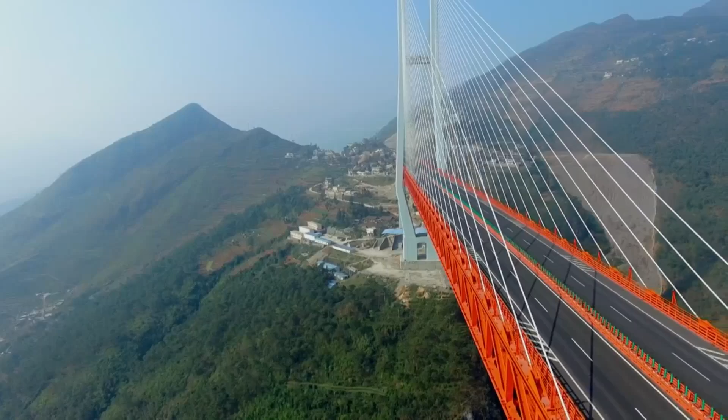The solution engineers in China have come up with is breathtaking. This is the Beipanjiang First Bridge. With a deck nearly 2,000 feet above ground, it's the highest bridge in the world. It is remarkable how high this bridge is and how long it extends. And at almost a mile long, it's one of the longest cable-stayed bridges on the planet.

Liu Ba is deputy chief engineer of the bridge. So this is the Beipanjiang Bridge. Yeah. It's normally off-limits to pedestrians, but he's giving two colleagues a unique tour. It's very high. Very high. When we came here, it's very difficult to go to the two sides. Yeah. It's the highest bridge in the world now. Yeah. Such a beautiful bridge.

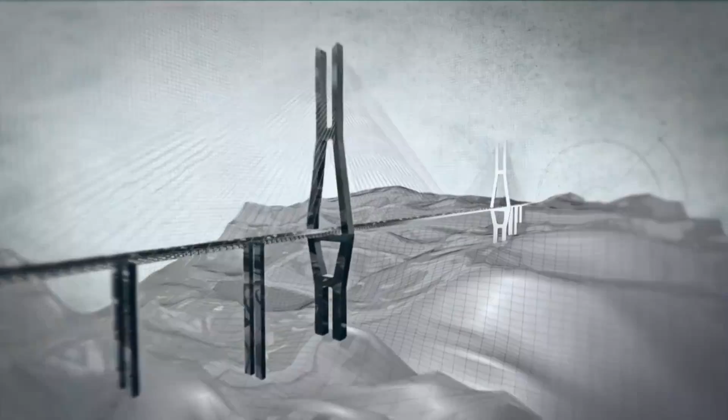The bridge is made up of a pair of massive concrete towers, the tallest reaching 883 feet high. The 22,000-ton steel bridge deck is the length of 5 Titanics. It's so high, One World Trade Center in New York could fit underneath. The deck is attached to the towers with 250 miles of cables, enough to stretch from New York City to Washington, D.C.

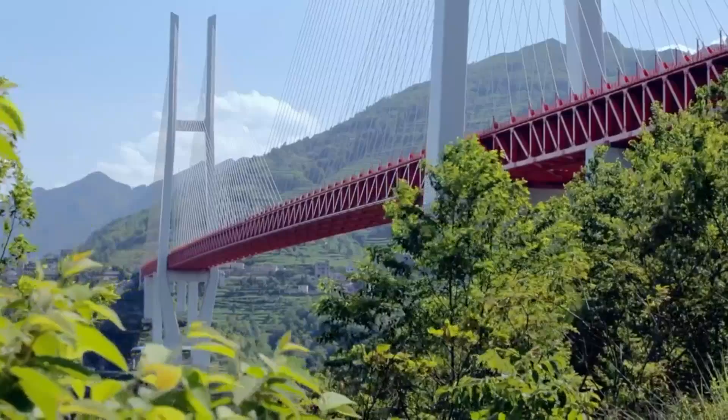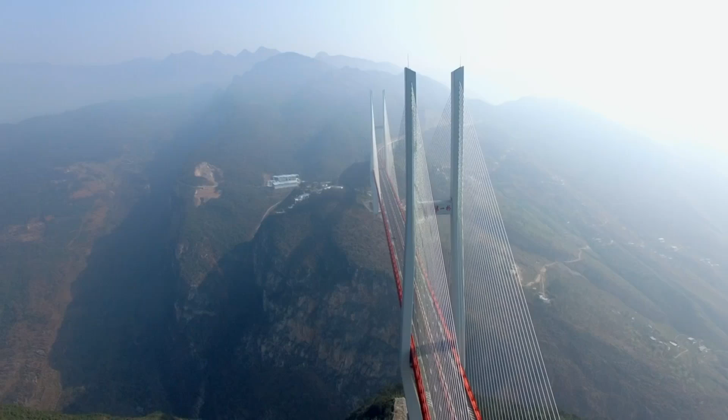But to create this unprecedented structure, the team need to solve many tough engineering challenges. How do you construct terrifyingly high concrete towers? It's very difficult to pump the concrete from the bottom to the top. It's really a critical issue during the construction. How do you assemble a super long bridge deck in such a dangerous environment? The valleys here are so deep you can't even see the bottom. This is too high to build temporary scaffolding for a bridge deck.

And what type of bridge do you build on vertical cliffs full of hidden caves and crumbling rock? To build a bridge here is really a great challenge for me. I'm not sure we can achieve it or not. Before engineers could even get started, they would have to find a way to work with the area's deadly geology. The rocks around this region are very soft. Also, it's very steep. To make things even more difficult, there are a lot of hidden caves and cracks along the mountain. This poses a huge challenge for the engineers to design the bridge.

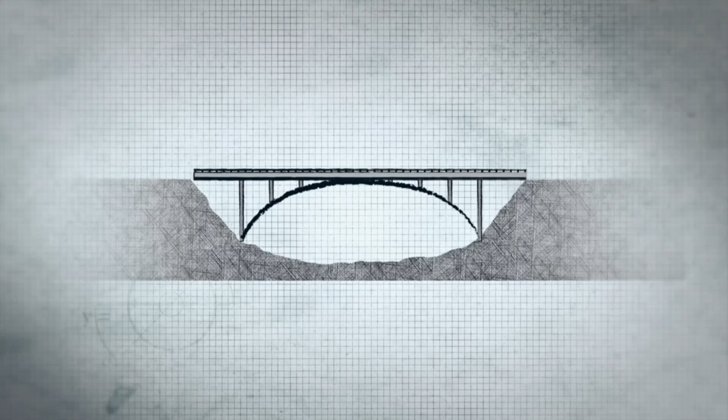Most types of long-span bridges need support anchors built into the rocks. For an arch bridge, weight pushes down, and the bridge's curved shape moves the force sideways. So they need gigantic anchors in the banks. On a suspension bridge, the deck hangs from 2 cables, which also need huge anchors to keep the bridge from collapsing. But the soft, crumbly, landslide-prone rock in this region isn't suitable to hold massive bridge anchors.

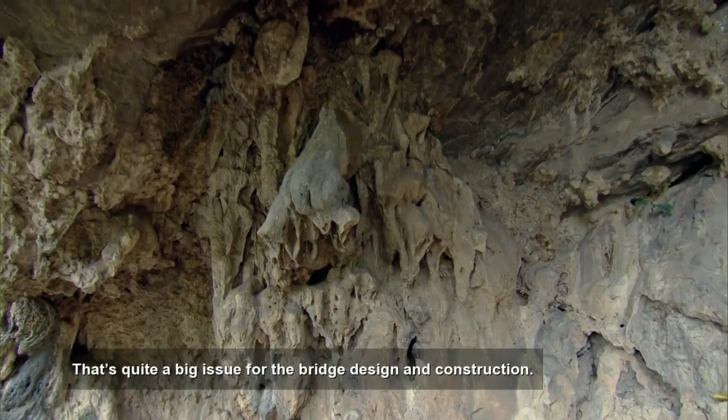Liu Ba is on site surveying the rock. This is an example of the difficult geology. The limestone rock, and you can see so many caves and cracks on the rock. That's quite a big issue for the bridge design and construction. It's really a nightmare for the engineer. The only option is to find a bridge design that doesn't need the support of anchors, which means the team will have to draw inspiration from the pioneers of the past.

This is amazing. A tour of London on a beautiful sunny morning on a boat on the River Thames. Physicist Andrew Steele is exploring London from a unique perspective. Look at this absolutely beautiful structure. It's the iconic Tower Bridge. From down here, this structure just looks absolutely enormous. There's an incredible range of bridges in the British capital, which could help inspire the team in China.

This is Blackfriars Bridge. It's an arch bridge. It was constructed in 1869, and from underneath you can see these beautiful wrought iron ribs which are holding the whole structure up. Here we have Chelsea Bridge, a suspension bridge. You can see that big red cable running along the top. That's the main cable. Among these famous giants, there's a lesser-known bridge that's actually one of the most important in the world.

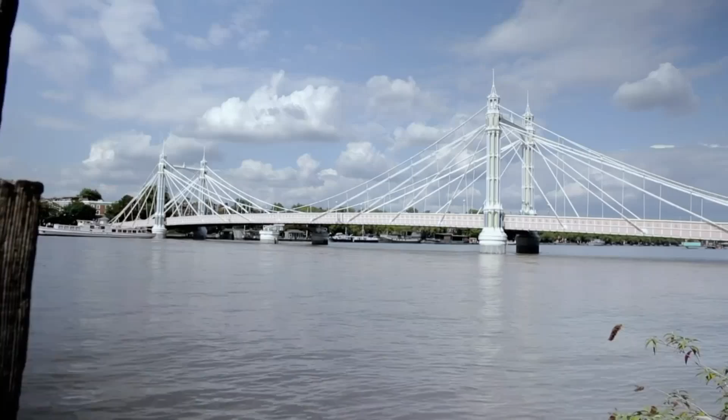This is a piece of engineering history, an entirely new type of bridge that people didn't think at the time could even be constructed. Built in 1873, this is Albert Bridge. From an engineering point of view, there is an awful lot going on here. You can see we've got these support columns, we've got the curved cables, the straight cables. Pretty daring for the time. Albert Bridge is the brainchild of British engineer Rowland Mason Ordish, who was determined to build the impossible.

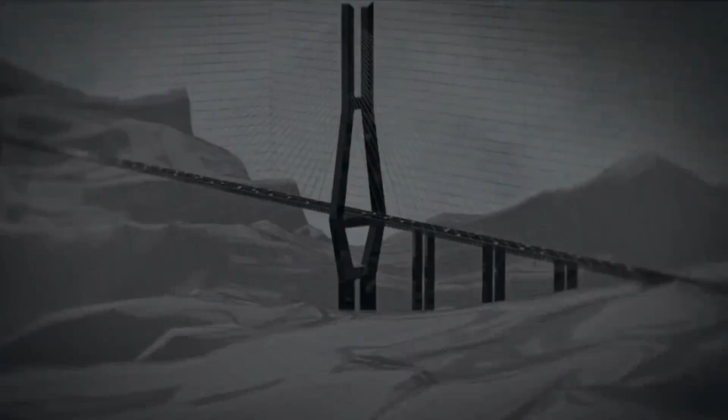The Victorians had managed to build loads of different kinds of bridges, but there was one particularly desirable design that remained elusive. It's called the cable-stayed bridge, and the idea actually dates from centuries before. It was in the 1600s that the first cable-stayed designs were proposed, even before the existence of actual cables. The design of a cable-stayed bridge means all the weight is carried up through the cables and down through the towers, so it doesn't need anchors on the banks.

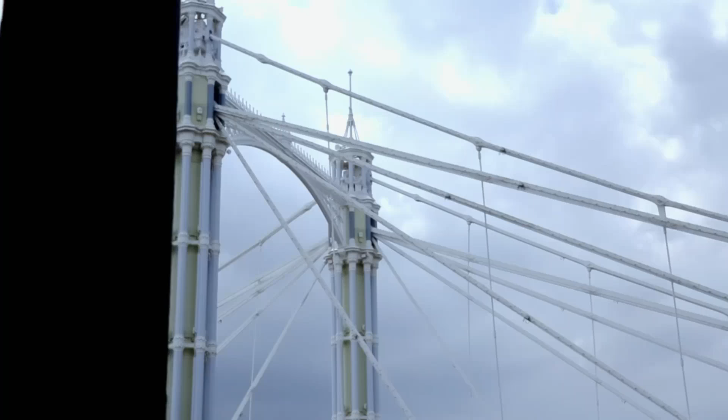But in the 19th century, building a cable-stayed bridge had never been successful because the forces are so complex. The problem was the maths was just too hard. Imagine trying to calculate all the forces on one of these cable-stayed bridges. You've got loads of different cables, all at different angles, pulling on the bridge, pulling on each other. It's a trigonometry nightmare. Over-tensioning even a single cable could lead to a catastrophic failure. For 200 years, people thought the cable-stayed bridge was never going to be built.

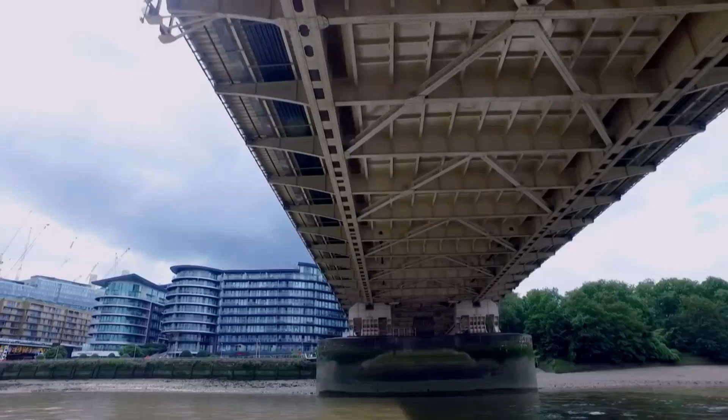Ordish knew the risks of building a cable-stayed bridge. So to ensure Albert Bridge didn't fail, he ingeniously combined it with a suspension bridge. From up here, you can really see what's going on with this bridge. Since we're in the middle, this is the main cable, the suspension bridge aspect of this structure. And we've then got these smaller suspenders. And what these do is connect the main cable to the span of the bridge, allowing it to support the bridge at multiple points along its length.

And then finally, this is what makes this bridge so special. Here we find the cable stays, and it's really clear from this angle what they do. They're taking some of the load from this span and then transferring the force up into those towers there. This is two bridges in one, and that is the genius of Ordish's revolutionary design. Albert Bridge was a major step towards building a pure cable-stayed bridge that didn't need anchors. Exactly what the engineers in China are looking for.

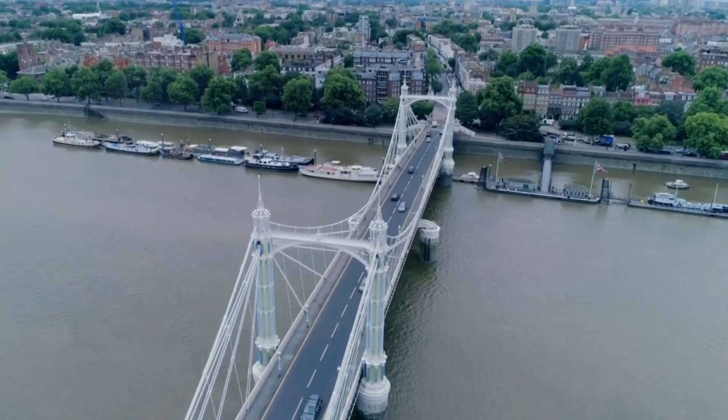And today, cable-stayed bridges are commonplace. So when you see a modern cable-stayed bridge, it's all thanks to pioneers like Ordish, who, over 150 years ago, showed that this elegant and deceptively complex design could be done. In China, engineers are building on Ordish's groundbreaking work and supersizing it for the 21st century.

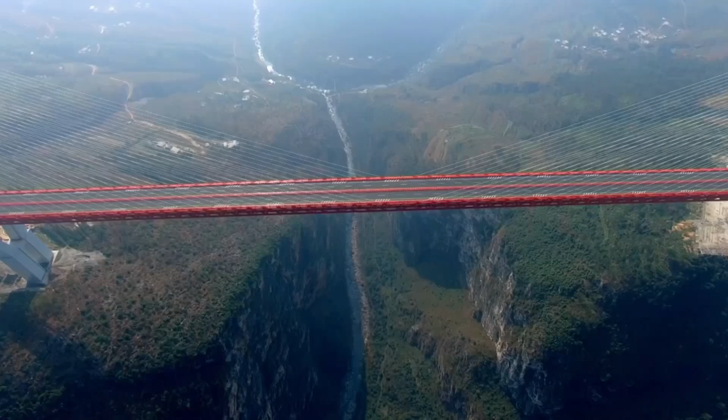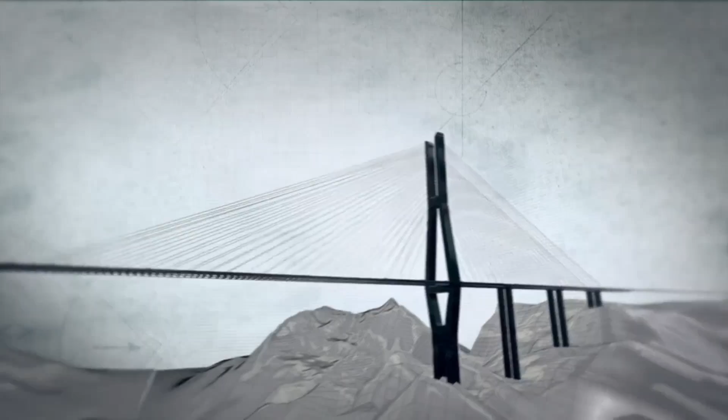The Guizhou and Yunnan regions of China, separated for centuries by this cavernous abyss, until now. This is the Beipanjiang First Bridge. The bridge stretches almost a mile across the ravine. The tips of the towers reach 2,461 feet above the valley floor, higher than two Eiffel Towers and the Statue of Liberty combined. And it's the first ever cable-stayed crossing to hold the title of world's highest bridge.

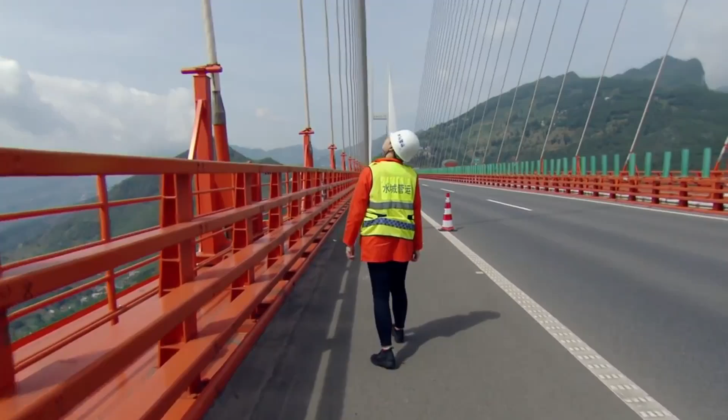Architect Wendy Falk has special access to this engineering marvel. This bridge is amazing. This is so exciting. I'm going to actually go and climb over this and take a closer look at the cable stay myself.

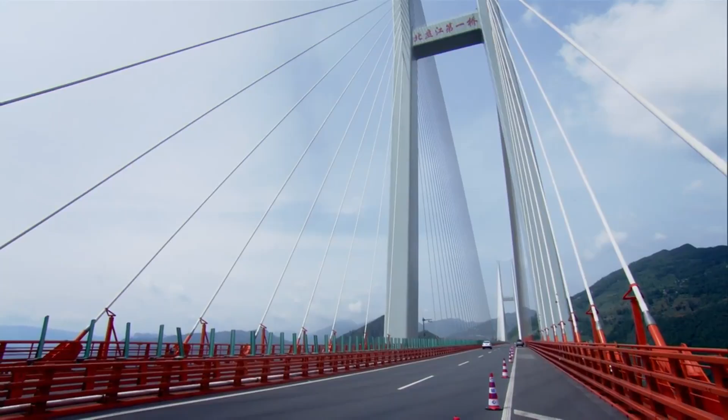The view up here is absolutely insane. It's actually quite amazing that this bridge is held up by the cables and by these amazing towers that are on the left and right of us. So there are no anchors on this bridge. The only way to build this bridge in this region is to have a cable-stay design.

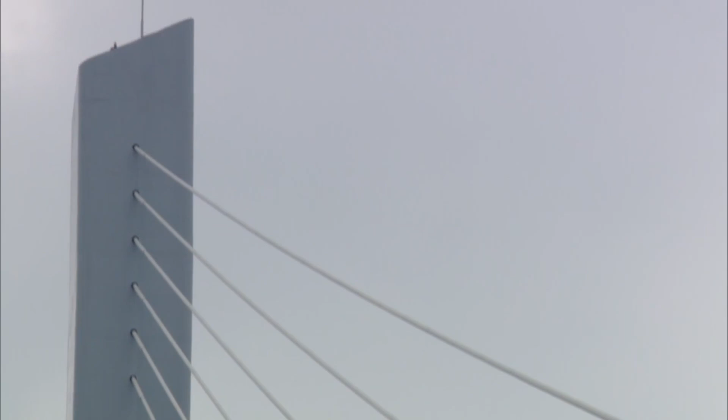The load from the 22,000-ton deck and everything on it is carried through 224 cables into the towers and down into the foundations, removing the need for anchors. But attaching each cable was an extensive job for engineers. There's actually a lot of smaller cables on the inside that's bundled up that is then connected onto the anchor point on the bottom.

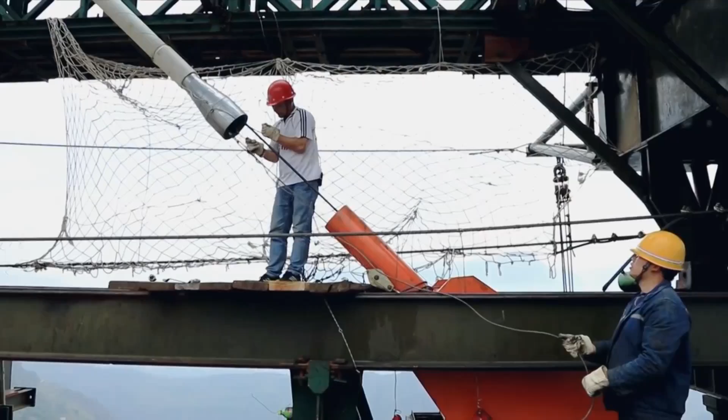First, one of the cable strands is pushed through a waterproof casing. It's then attached to one of the towers and joined to the bridge deck. More strands are then threaded through the casing. Up to 43 make up one cable bundle, the longest of which is 1,253 feet. Each bundle is tightened into a carefully calculated strain.

Getting the cables and the tension right in this bridge is crucial. So inside of each of these cables is a gauge that measures the constant tension on this bridge. If any of the strand cables fail, engineers in a control center can immediately spot and replace them. The marvelous aspect about this bridge is that even if you were to remove one cable, the bridge is still stable. And that's pretty incredible.

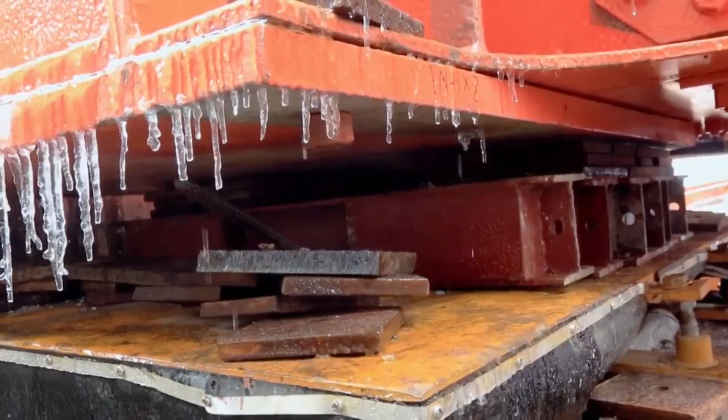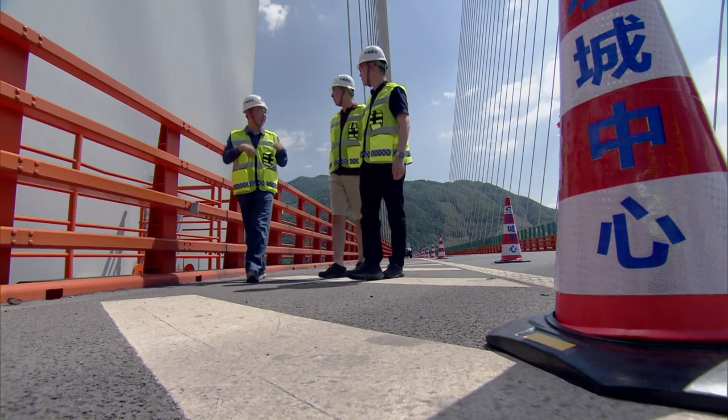But winter in Guizhou brings a new onset of problems. It is one of the most severely frozen areas in western China. And because of the bridge's altitude, ice could form on the cables. It's a potentially deadly problem that Liu Ba and his team have to solve. If the ice spreading comes, there will be some problems related to the safety of the traffic. So the ice will cover the cable in the winter. Yeah, the ice will accumulate.

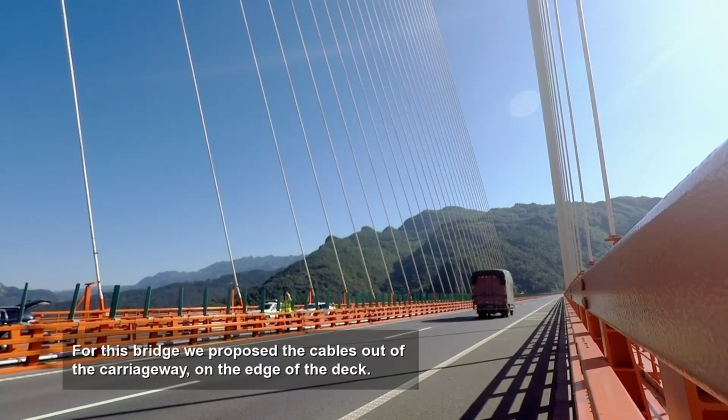Most bridges propose the cables in the middle, just above the carriageway. Yes. When the ice accumulates on the cables, there will be ice fragments falling down onto the deck. With the risk of falling ice causing a potentially fatal traffic accident, engineers came up with a brilliantly simple solution. For this bridge, we proposed the cables out of the carriageway on the edge of the deck. Then ice drops out of the carriageway. That's very clever. Yeah. Moving the cables to the edges of the bridge will force ice to fall safely into the valley and keep this lifeline flowing all winter long.

But engineers have even greater challenges ahead. In order to build the tower, the engineers have to think about getting concrete all the way up to the top. It's just mind-boggling.

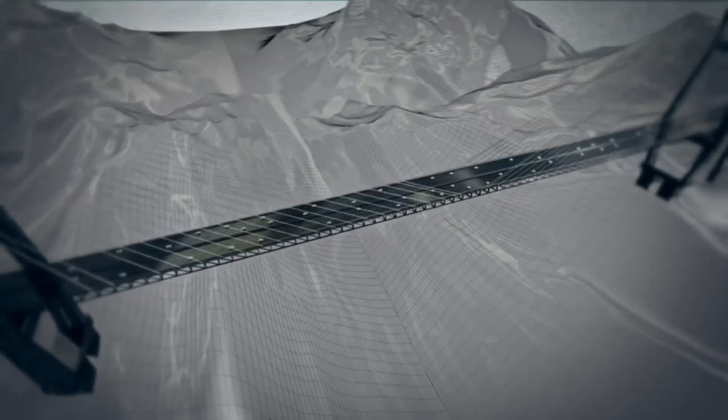Guizhou Valley, China. Known as the crack in the earth. To cross it, engineers are taking on the impossible with the world's highest bridge. The Beipanjiang First Bridge is a crucial crossing for millions. At almost a mile long, and with a staggering 2,362-foot main span, this is a cable-stayed bridge on an epic scale. But designing a structure of this magnitude presents a terrifying set of challenges.

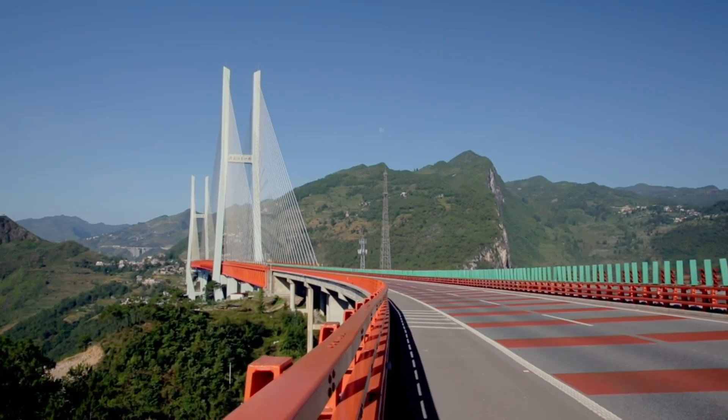Architect Wendy Falk has traveled from New York to check out this engineering marvel. This bridge is incredibly long, and it's really rare for a cable-stay bridge to be this long. Devising a super long cable-stayed bridge is extremely complex. Everything is connected. If one thing changes, everything else is affected too. Imagine my hands are the cables, and as the span of the bridge gets longer, the angle of the cables gets flatter, and that's bad because it puts the deck under compression.

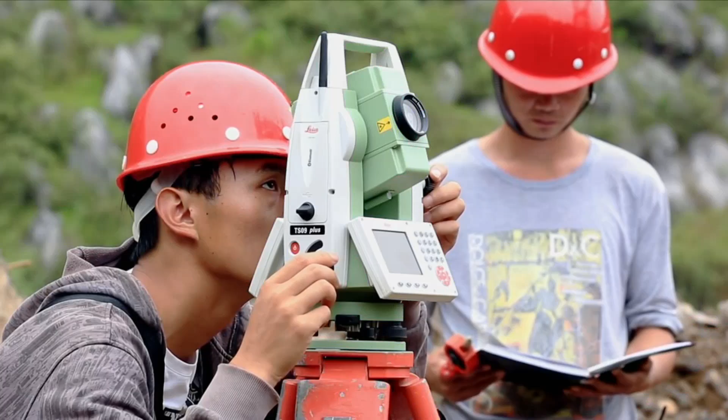There's an optimal angle for these cables, which is 30 to 40 degrees. And in order to build a bridge this long, you need a very tall tower. Basically, the longer the bridge, the taller the tower. This exceptionally long bridge needs exceptionally high towers. In order to build the tower, the engineers have to think about getting concrete all the way up to the top. It's just mind-boggling. So how do you build soaring concrete towers? The answer lies with a pioneering innovation from the past.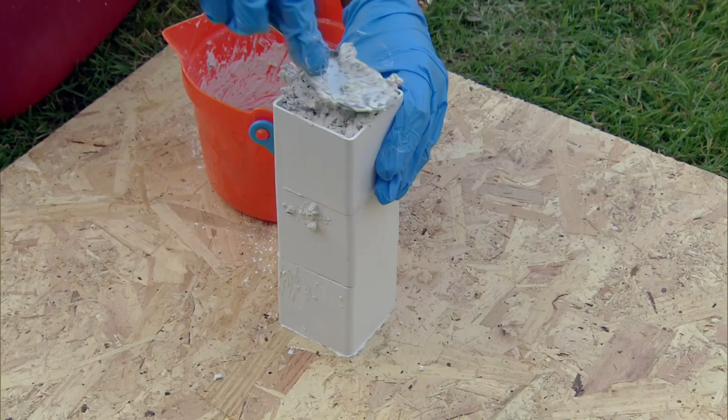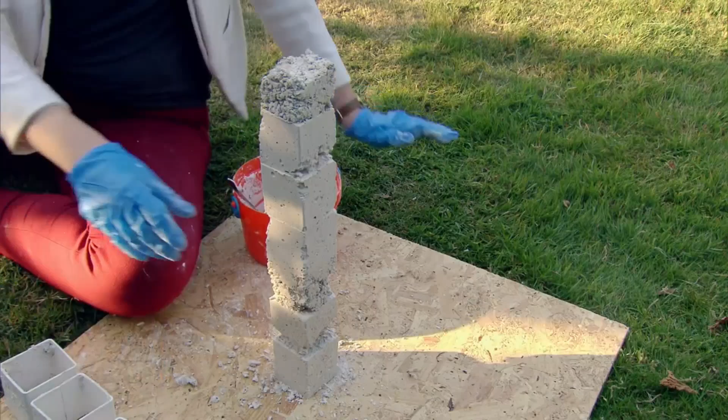By the time I've poured in the top two moulds, the bottom one has set. So then I can remove the bottom mould and place it back on the top and keep going. And then you could just keep doing this, moving the different moulds up, and the tower would grow floor by floor. And the only limit was how tall you dared to go. It's called climbing formwork. Yes, there we go. And it's still the go-to method for building tall concrete towers. Oh goodness. There we go. I think if Peterson saw this, he'd think I need a little more practice before I build a real one.

Incredibly, Peterson used just 3 moulds to build this entire concrete tower. It's still the tallest non-reinforced concrete structure in the world. What's incredible is you can still see the lifts where each of the layers of concrete was poured, and it would have taken 2 days to fill each one and then 2 days to move the bottom one up to the next layer, and it took 6 years to build.

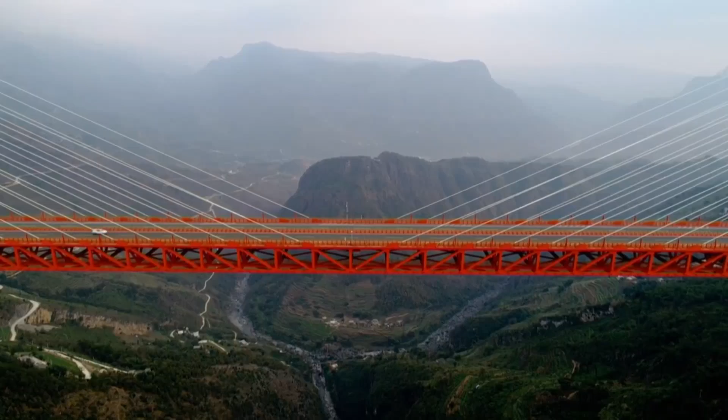Peterson proved the world wrong. He showed us 130 years ago that we could build a tall tower out of concrete, and that paved the way for us using concrete in structures today. Now, engineers in China are using Peterson's revolutionary construction method and taking it to the next level.

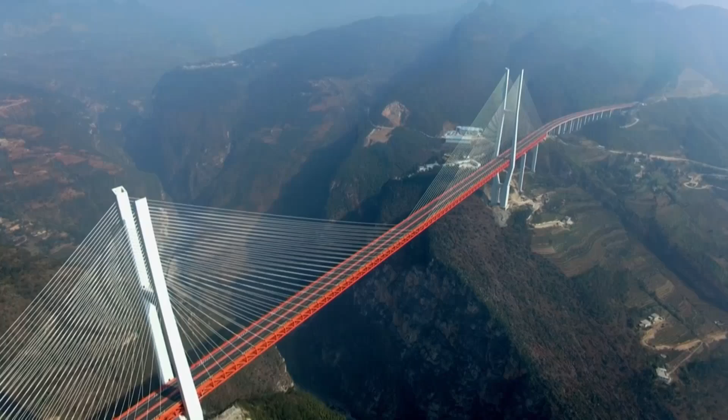The Beipanjiang First Bridge in China boasts 2 massive towers, the tallest reaching 883 feet. Engineering megastructures in their own right. This thing is colossal. You can see from top to bottom, it's just so big. But before these towers could be built, engineers first had to make more than 130,000 tons of concrete. Zhou Ping, director of the Beipanjiang Bridge, is tackling this issue.

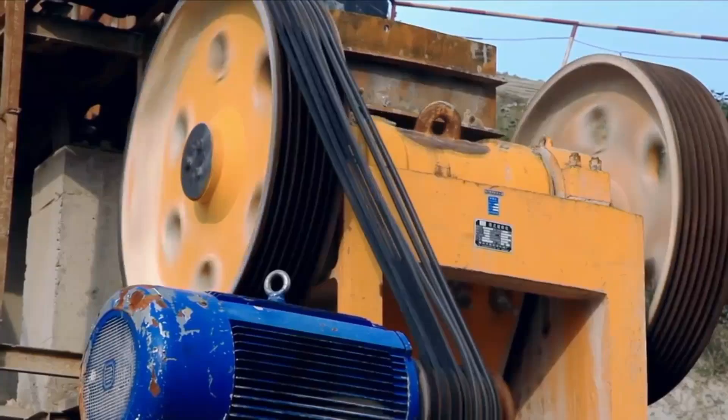To make a bridge, we need tons of concrete. To make concrete, we need lots of sand. But you can see around here, there is no natural sand. It's a huge problem. The answer was to use the difficult environment to their advantage. To solve the problem, we produce millions of tons of man-made sand. Just like this, we make it by crushing and grinding rocks into small pieces. Crushing the soft rock to make sand is an ingenious idea, but it also has an added benefit. We can control the size of the man-made sand to make different strengths of the concrete.

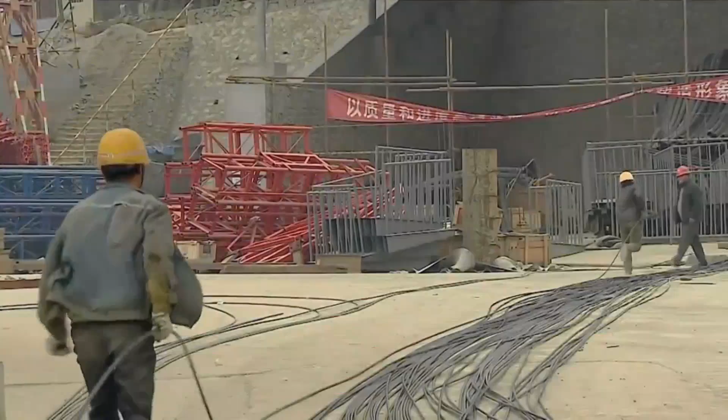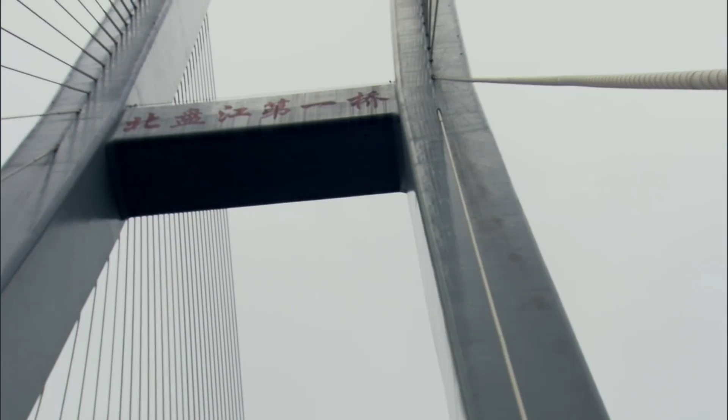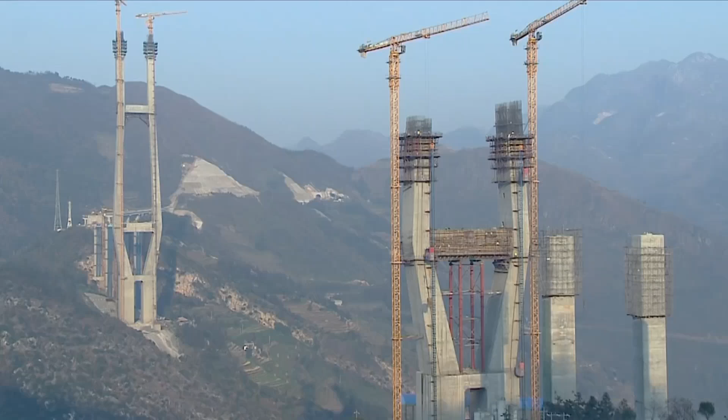Finally, construction of the towers can start. Thousands of steel bars are formed into a grid to reinforce the concrete once it's poured. Just like at England's Sway Tower, climbing formwork is the key to raising these super towers. In order to build the tower, the engineers had to design a mould. And then they added concrete into the mould and then lifted it up manually so that they went up section by section. Assembling the moulds manually enables precise control, so engineers can form the demanding H-shaped design.

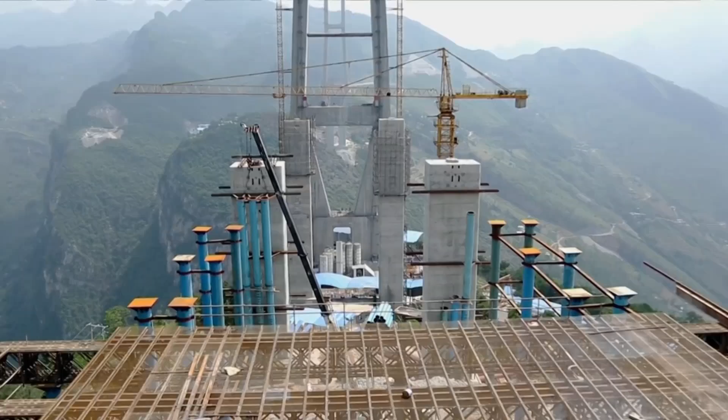But as the towers grow, so do the challenges. Initially, concrete is lifted in enormous vats by huge tower cranes. But at greater heights, a pump is needed. Man-made sand is a little bit rougher than natural sand, so it is difficult to pump up to the top of the tower. So we have to use a great pressure pump to pump it up. A high-powered, gravity-defying pump is used to propel the thick concrete to a height of almost 900 feet.

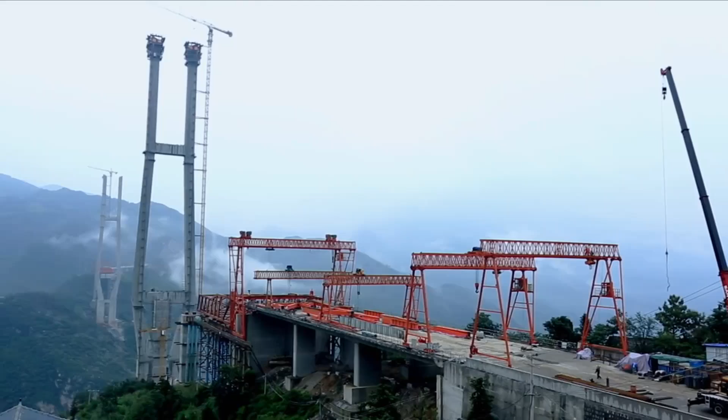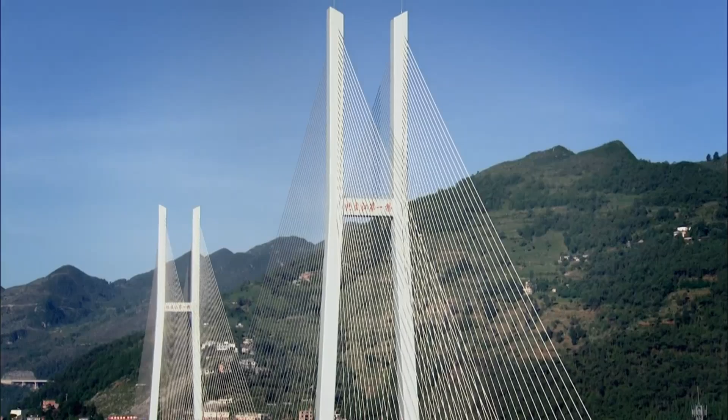These towers seem to be going on forever. You can't even see the top of it. It is quite amazing here. More than 12 million gallons of concrete were used to make this pair of colossal towers. And you can still see the lines that are left behind from the mould all the way to the top, and that's pretty cool. These exceptionally tall towers ensure the cables are at the optimum angle to take the weight of the massive bridge deck. Because the bridge needs to be so long, these towers need to be so high, and the engineers definitely did that.

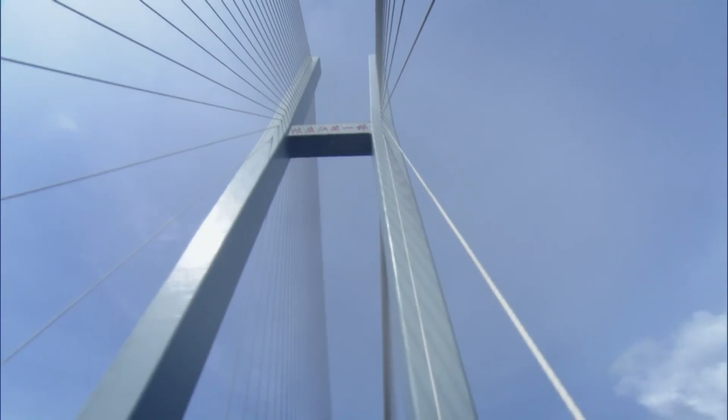But to bridge this mighty chasm, engineers will face their greatest obstacle yet. It's impossible to build a scaffolding to reach up here.

Guizhou, the most poverty-stricken region in China. This impassable valley restricts development. The solution? The Beipanjiang First Bridge, the highest on the planet. At 883 feet, the largest tower is taller than Rockefeller Center in New York. The two towers hold 224 cables, with a combined length of 250 miles, 5 times longer than the Panama Canal.

Engineers are now facing the most dangerous phase of the project, constructing the bridge deck. It's a gorgeous view. Super deep. New York-based architect Wendy Falk is at one of the project's highest points. It's so difficult to even see to the bottom of this valley. It's impossible to build a scaffolding to reach up here, to build a bridge deck. So the engineers had to find another way.

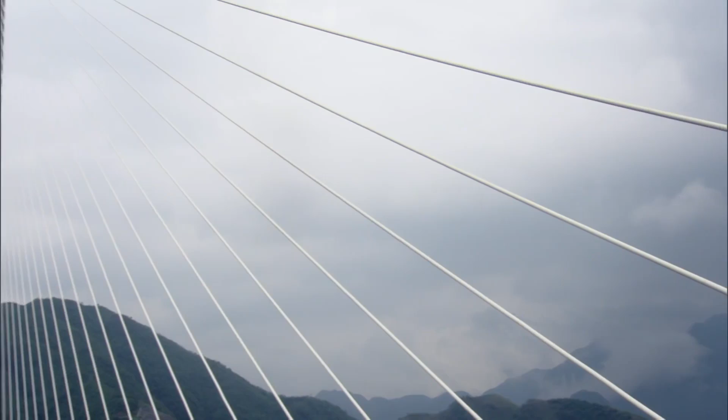Now, engineers need to support the nearly mile-long bridge deck while it's being built without scaffolding. A feat that might not be possible if it weren't for the innovators of the past. Engineer Luke Bisby is at the Firth of Forth, near Edinburgh in Scotland, to see a piece of engineering that could help out the team in China.

In the late 1800s, engineers were in a desperate race to build a rail line between London and Aberdeen along the shortest route. And this meant building a track along the east coast of Scotland. But this huge estuary, the Firth of Forth, was standing in the way and presented a major obstacle. The typical method of building bridges at the time was to use temporary scaffolding to hold up the span while it was constructed. Once complete, the scaffolding was removed, leaving the finished bridge.

Here, it's completely impractical to build a bridge with a scaffold. Not only is the estuary very wide, but it's also very deep. And even if you could get your scaffolding poles down that far, the bottom is completely full of mud and silt, and so they wouldn't hold. Here, it would take an incredibly bold engineer to build the bridge without a scaffold, and of the enormous span lengths required, which had never been attempted before. British engineer Benjamin Baker risked his reputation when he took on this impossible challenge.

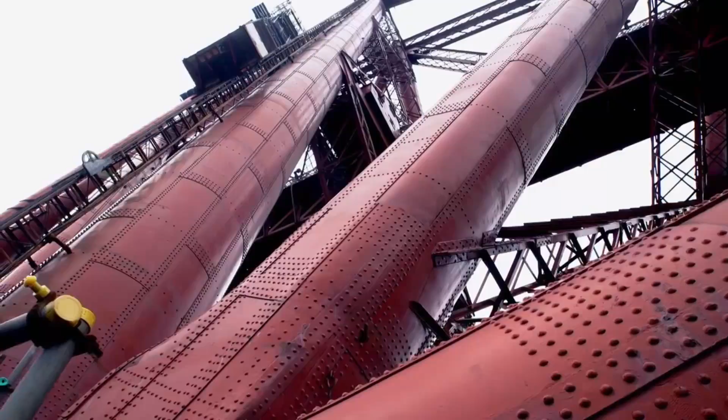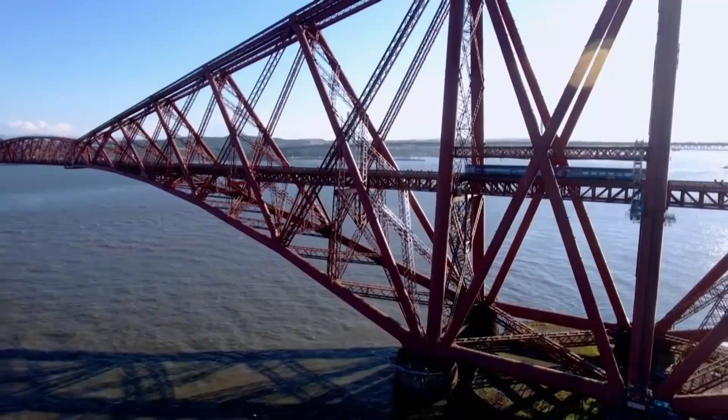Baker's solution is one of the most astonishing pieces of Victorian engineering anywhere in the world. Now, this is just incredible. This is the Forth Bridge. Now that is a view. A 1.5-mile-long cantilever design. The longest bridge in the world when it was built. That is amazing. Engineer's bucket list, this one. Constructing such a long bridge here was not going to be easy.

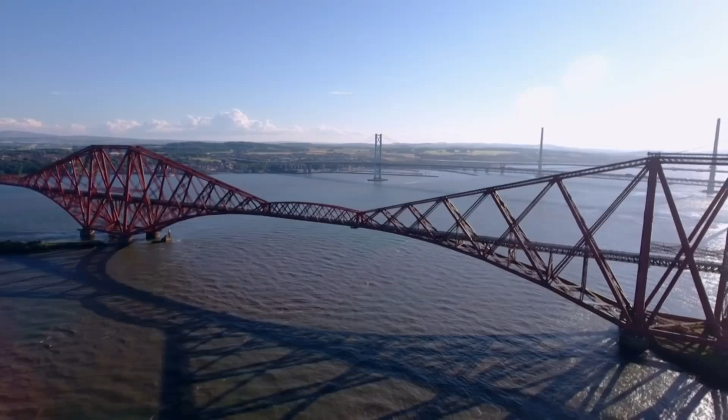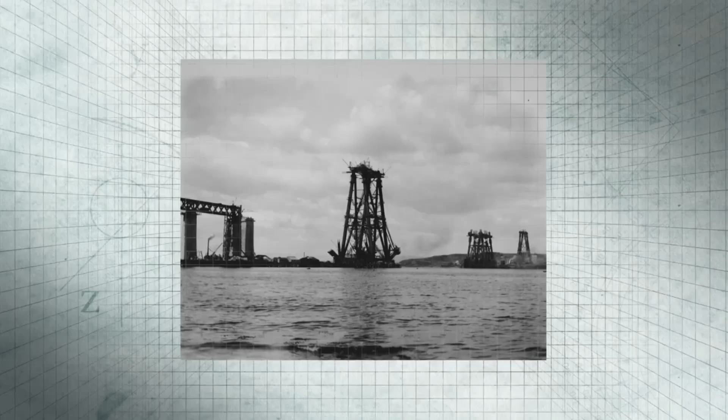However, Baker had an idea that might help the engineers at the Beipanjiang First Bridge. Cantilever bridges are all about balance, with the weight of the steelwork on one side of the tower balanced out by the steelwork on the other. Baker also used that counterbalancing act to construct the bridge. The towers were constructed first, and then the bridge was built out symmetrically on either side. Every time a beam was added to one side of the bridge, an identical beam was added to the other side of the bridge. And in this way, the bridge became the scaffolding for its own construction, and it seemed to defy gravity.

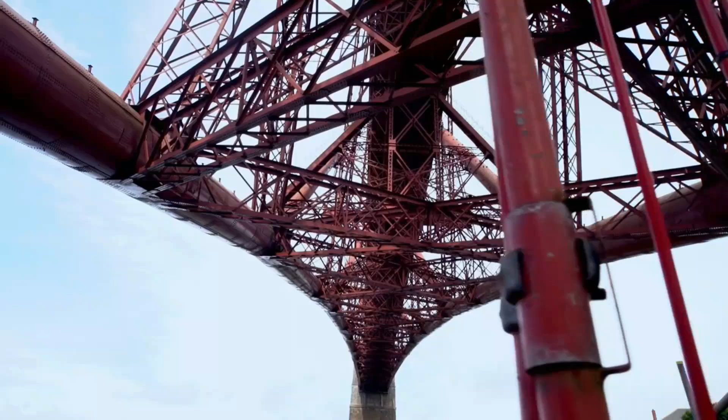It was an incredible solution, and Baker's risk paid off. The Forth Bridge opened in 1890. It now carries 200 trains a day and 3 million passengers a year. 130 years ago, Baker's ingenious balancing act changed the way that bridges are constructed. Engineers were no longer reliant on scaffolding beneath bridges during their construction.

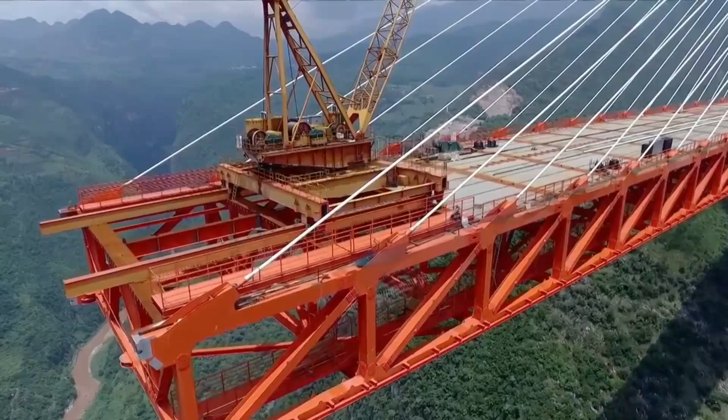At the Beipanjiang First Bridge in China, engineers have taken Baker's simple yet brilliant idea to jaw-dropping new heights. Like the Forth Bridge, they've constructed the deck without scaffolding by balancing it around the towers using cables.

In order to build a bridge without temporary scaffolding, let me show you what they did here. The approach span was already here. So in order to add a new section over the gap, I'm adding a cable to hold it up. To keep the forces balanced, I now need to add a cable on the other side of the tower. Adding the cables symmetrically keeps the forces around the towers balanced and supports the deck.

And now I'm adding another section over the gap. And every time I do so, I have to add a cable to hold it up, and another one on the other side of the tower to keep it balanced. I add another section, I add another cable in the front, and I add another one in the back. And there you go, a perfectly built cable-stayed bridge.

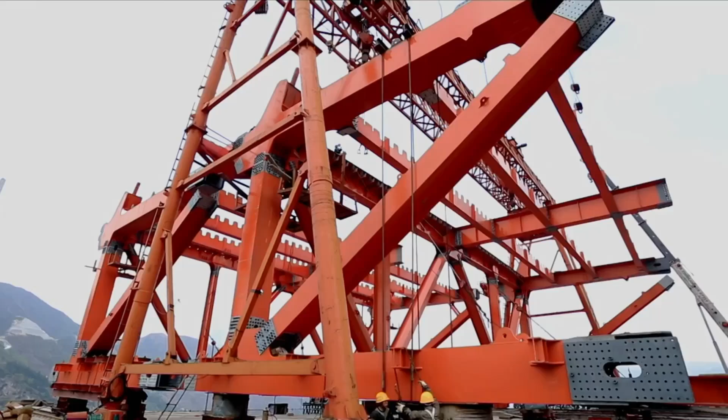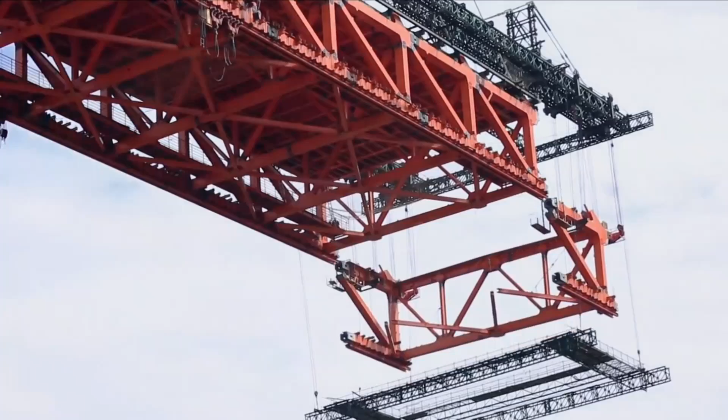During construction, instead of building beam by beam over the deadly drop, the main span is built in sections. Then, for the first time ever, the deck sections are slid underneath the growing span. They're lifted into place, then fixed to the end of the deck. Construction was twice as fast as traditional beam-by-beam building. After only 42 months, the two sides of this vast valley were finally connected.

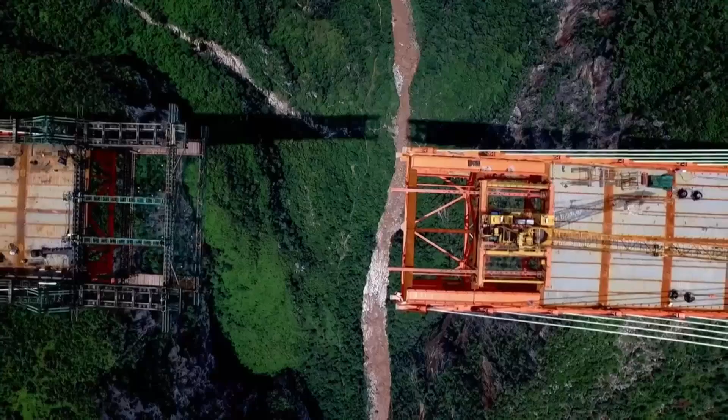Seems like I'm walking forever on this bridge. Can't believe how long this bridge is. What an amazing piece of engineering. But before traffic could cross the massive main span, the team of engineers had one last problem to solve.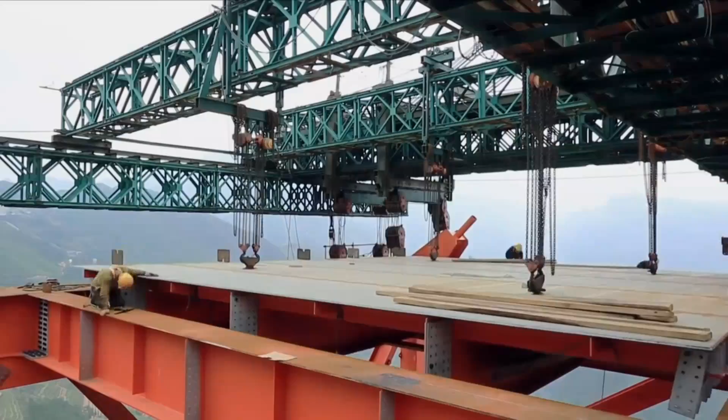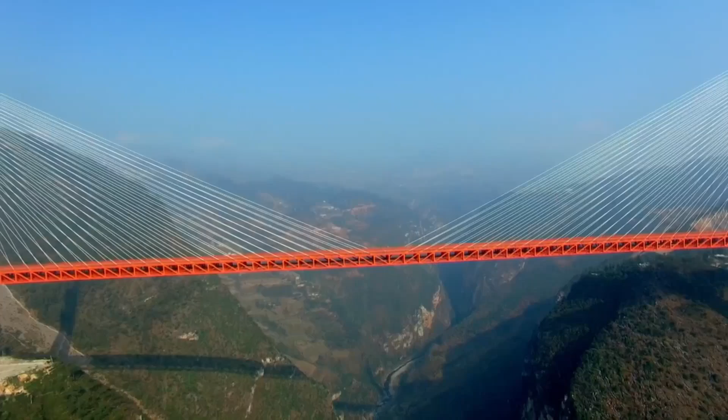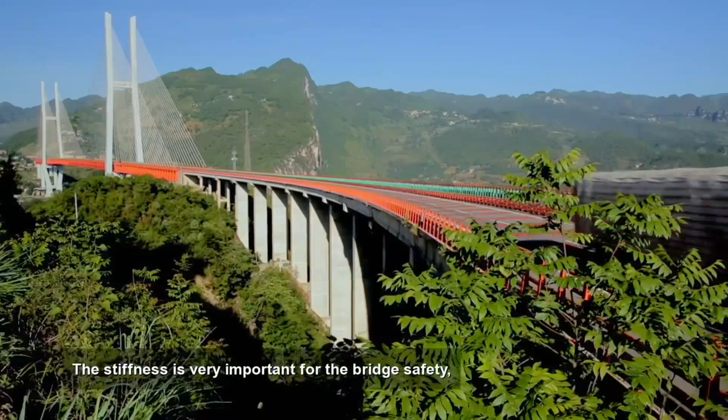After 42 months of construction, the Beipanjiang First Bridge finally connected the two sides of the massive Guizhou Valley. Now, engineers needed to ensure the bridge was safe enough for traffic to cross. There are so many heavy trucks in this region. When we design our bridge, we need to consider the loadings of heavy trucks. The stiffness is very important for the bridge safety, especially for such a long span bridge.

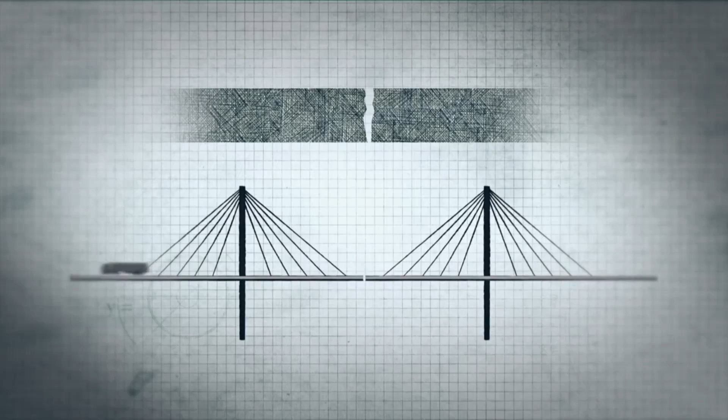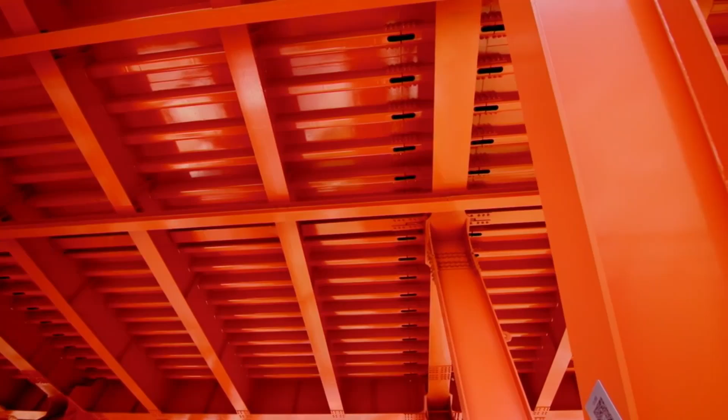When heavy vehicles cross the bridge, if it's not stiff enough, the deck could sag. If this happens repeatedly, it will cause fatigue, which makes the metal very brittle, risking a sudden collapse. Stopping this huge deck from flexing is a serious challenge. The solution? An orthotropic deck. Let me show you how the orthotropic deck works.

We select two pieces of flat card, and we make a bridge here, and then we put some weight on it. Wow, straight away, collapse. The card isn't stiff enough. So next, I will make an orthotropic deck. The two pieces of card are still used, but this time the bottom one will be shaped differently. I'm folding the card into a box shape. It's just like the U-beam of the orthotropic deck.

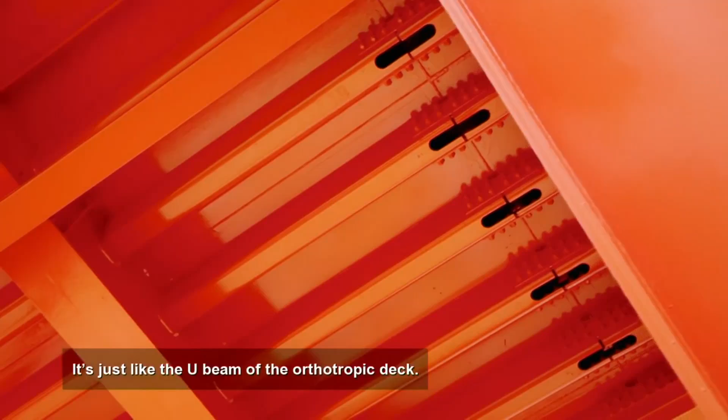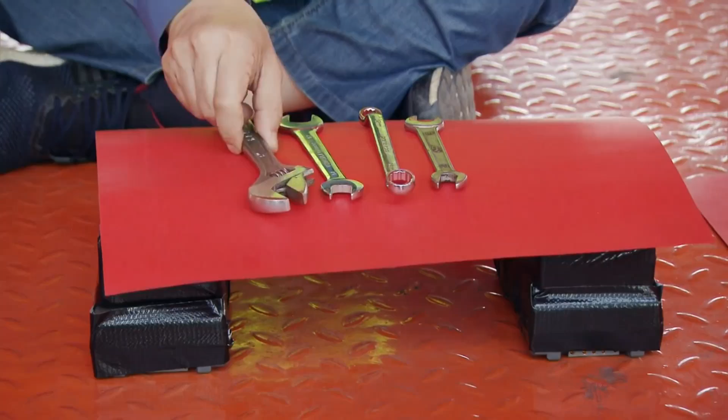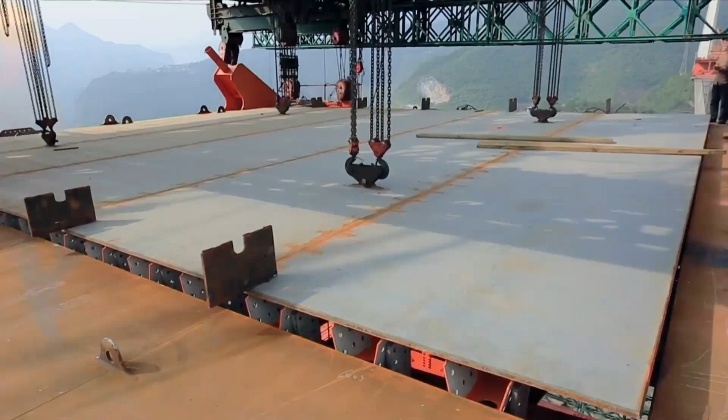We can see what happens to the stiffness. A new bridge here, and we put the same weight on it. Oh, still working. Excellent. Just by changing the shape of one of these cards, we can make it much stiffer. Now that the bridge is stiffer, it doesn't flex when it takes heavy loads, solving the problem of fatigue. The orthotropic deck was installed in 34-ton sections. The finished span is so stiff it hardly flexes, even in the middle.

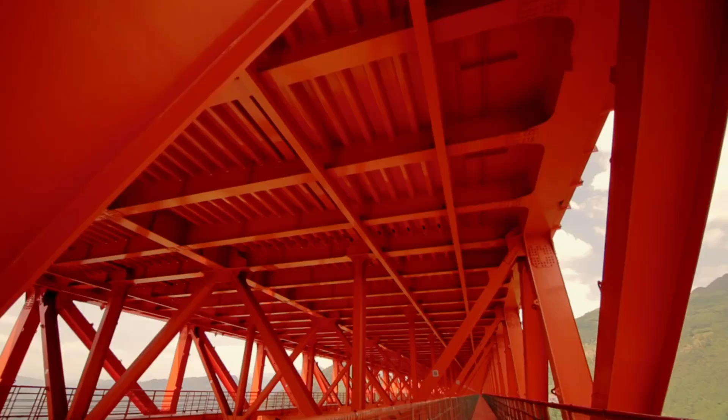To see it, Liu Ba is taking his colleagues to an area off-limits to the public, inside the bridge deck itself. Wow, look at this. Yeah, very amazing. We can see the orthotropic deck above, including the top plate and the U-ribs. We use U-ribs so we can provide enough stiffness for the heavy trucks. The orthotropic deck is the final piece of the puzzle for this world record-breaking bridge.

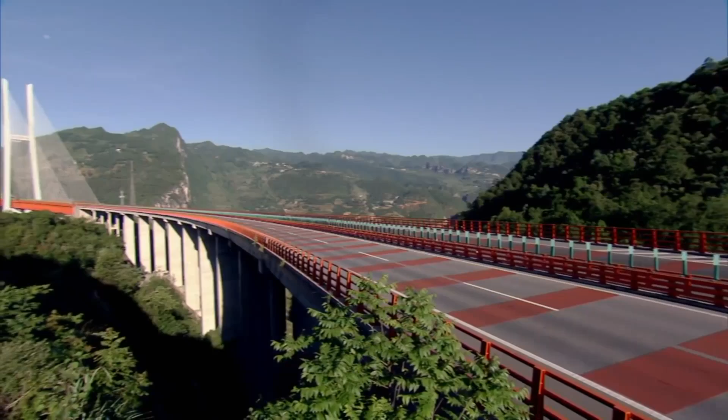It's hard for me to imagine how they actually built this thing at this height. I think it's very incredible. It's very beautiful. Just beautiful. The Beipanjiang First Bridge is taking engineering to breathtaking new heights. I can't imagine how this bridge could be built if it weren't for modern-day technology. You know, we really conquered so many challenges from the very beginning stage. It's really impressive.

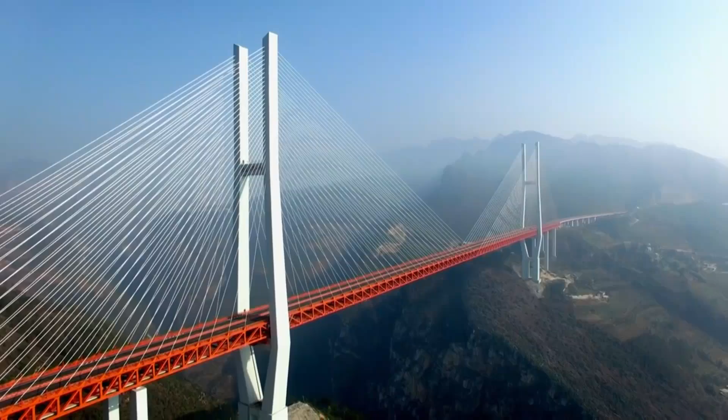Spanning the mighty Guizhou Valley, this astonishing bridge is engineering on a legendary scale. Almost a mile long, with 2 landmark towers reaching more than 2,400 feet above the river. It has 250 miles of steel cables to hold up a 22,000-ton deck. It's an epic structure, unlike any other. The Beipanjiang First Bridge is cutting-edge engineering on a staggering scale, finally joining 2 regions that have been separated for centuries.

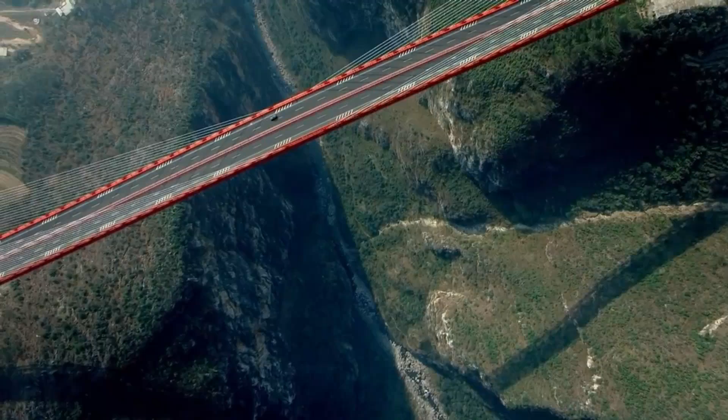We're now doing the same journey again, but instead of 5 hours, we're only taking 1 hour to cross this region. This is an absolutely amazing bridge, just really elegant. The view here is breathtaking. This bridge changed the local people's life. It is an incredible engineering achievement.

By learning from the pioneers of the past and overcoming terrifying challenges, engineers have pushed the boundaries of innovation. When I look at the bridge, I'm very proud of it. To me, it's more like a child. It's grown up and now it can contribute to society. And they've succeeded in making the impossible possible.